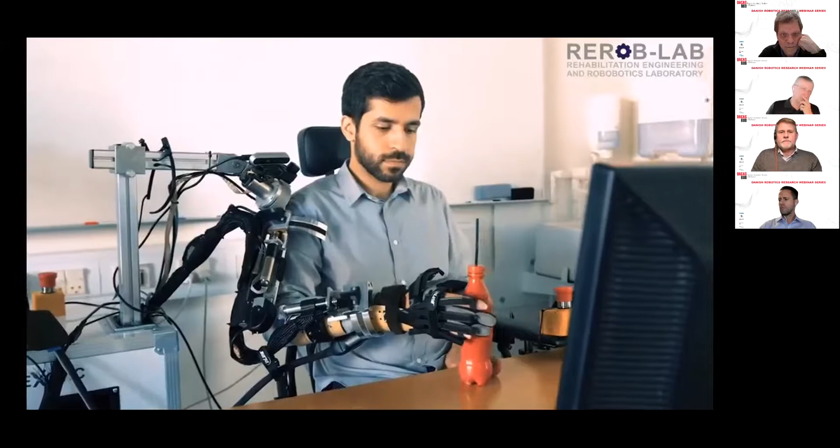Thank you, Thomas. Now we will present the Rehabilitation Engineering and Robotics Lab. My name is Lotte Andreasen Struijk, and I am an associate professor at Aalborg University. Here I am leading the Rehabilitation Engineering and Robotics Laboratory, where we study how robots can help paralyzed individuals. About 5 million people live with paralysis, and this can be caused, for example, by a stroke or a spinal cord injury or a disease like ALS.

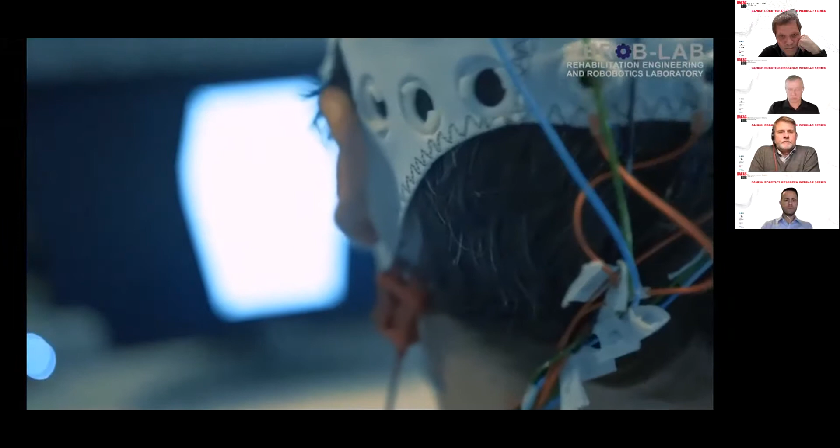Robotics has a great potential to help individuals that are paralyzed, but it's facing a paradox: the higher degree of disability, the higher is the gain, but the harder it is to control the robots. So our aim is to solve this challenge. To do this, we perform research on assistive robotic manipulators, both in nearby and remote settings. We develop new exoskeletons based on size, space, pathology, and user requirements. And we research on different control methods, for example, tongue control, muscle control, brain control, and we combine these control methods into hybrid systems.

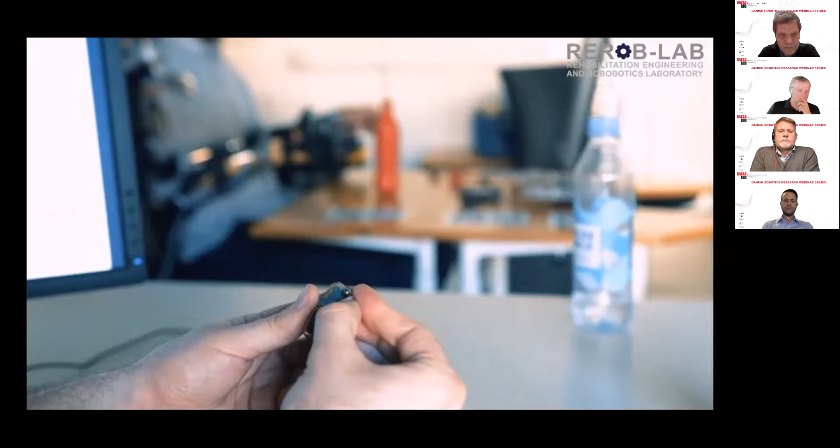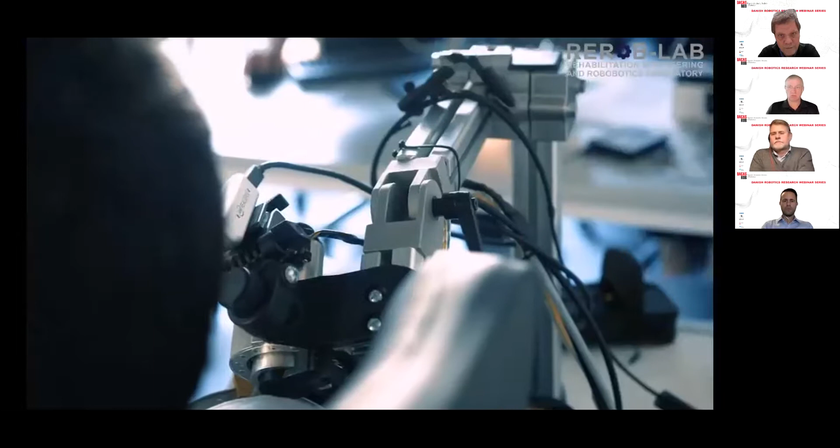We use intelligence and semi-automation with a special focus on shared control, and we test our systems both in able-bodied individuals but also in individuals with paralysis. We collaborate with industry and clinicians and with the users to create useful solutions, and we use the nearby facilities for innovation to transform our research into available products.

In the following, we will present 3 different projects. The first one is the Exotic project, where 4 PhD students and a postdoc collaborate to create an intelligent tongue control exoskeleton. The second project is the Multi-Rob project, supported by the Danish Research Council, where 2 PhD students and a postdoc work together to create brain control, muscle control, and tongue control of an assistive manipulator, and to combine these control systems into hybrid systems. The last project is about brain control of an exoskeleton.

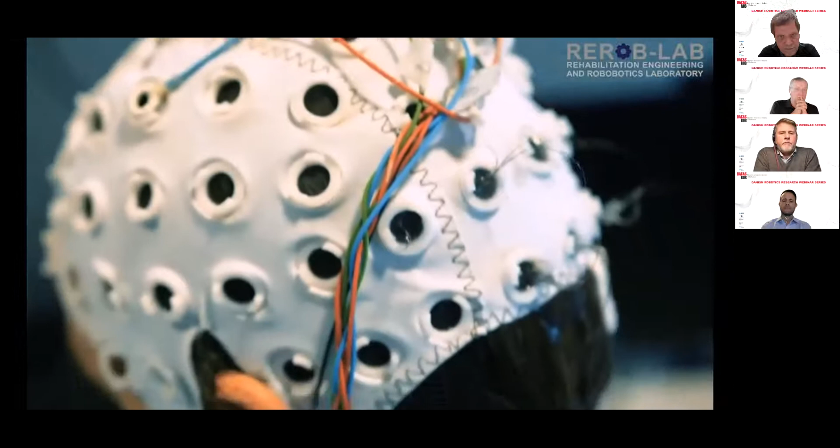So the first project we will introduce is the Exotic project. Here 4 departments work together to create a novel 5-DOF exoskeleton arm, which is semi-automatic and controlled by the tongue using the 9-DOF iTongue control system developed in this lab. The design of the exoskeleton is based on interviews with users paralyzed from the neck and down, and the users prioritized drinking and eating over a longer time, for example snacking, to avoid repeatedly having to ask for help.

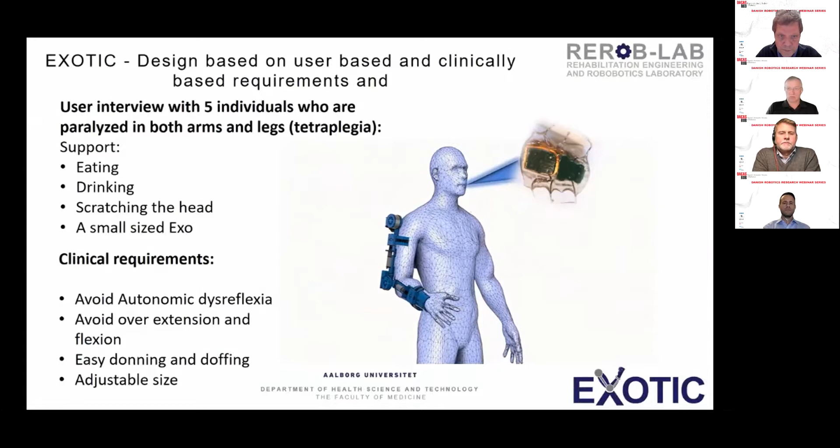In addition, in the design, we included a shoulder DOF reduction due to user requirements related to aesthetics and the limited space while sitting in a powered wheelchair. We used biomechanical modeling to assure that the exoskeleton still had the desired workspace.

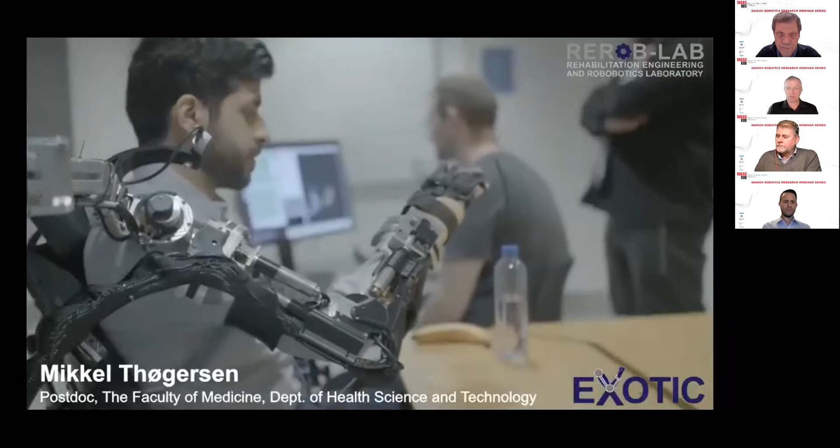The Exotic exoskeleton relies on a rigid structure driven by small motors located along the length of the exoskeleton, together with a soft exoskeleton glove. In total, there are 5 degrees of freedom, including hand opening and closing. The upper arm rotation and wrist joints use a relatively special joint based on a semicircular guide design that twists the arm and allows for a more compact design, as shown in the video.

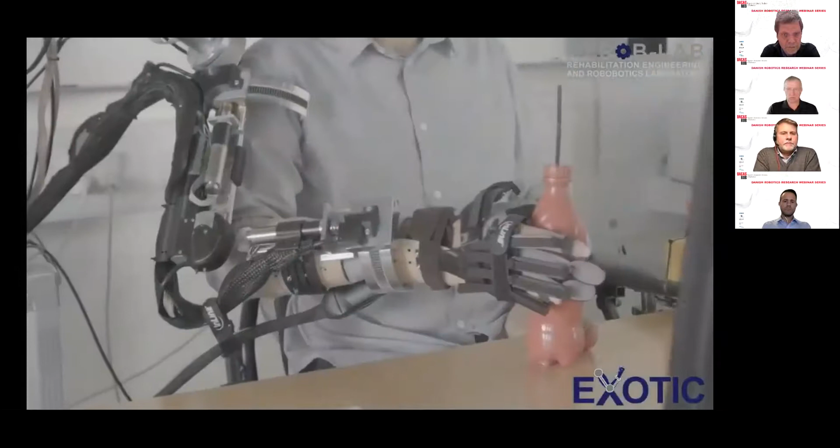For this exoskeleton, ergonomics was an important factor, as individuals with complete paralysis are prone to exhibit an autonomic response to pressure and irritation applied to the skin. Therefore, the exoskeleton has a soft attachment to the arm. As such, the arm is simply carried by 3 ergonomic braces located along the arm.

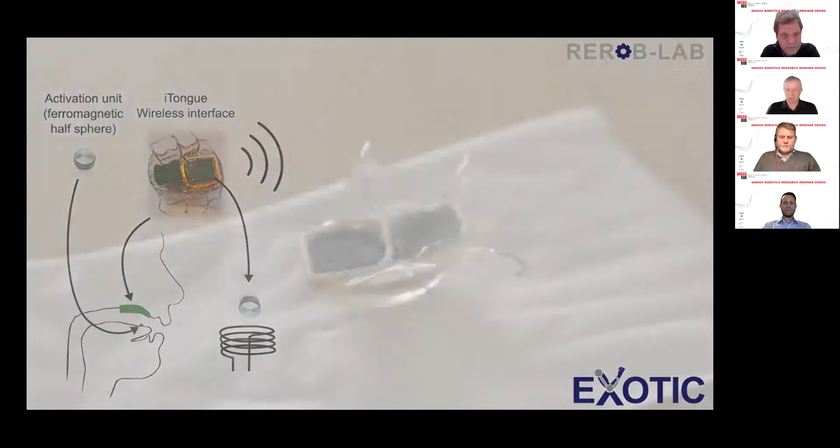The first problem you encounter when developing assistive technology for individuals with complete bodily paralysis is that they cannot use a standard interface technology like a joystick. Therefore, our group developed a wireless tongue control interface some years ago. The interface looks like a palatal brace and is put in the roof of the mouth.

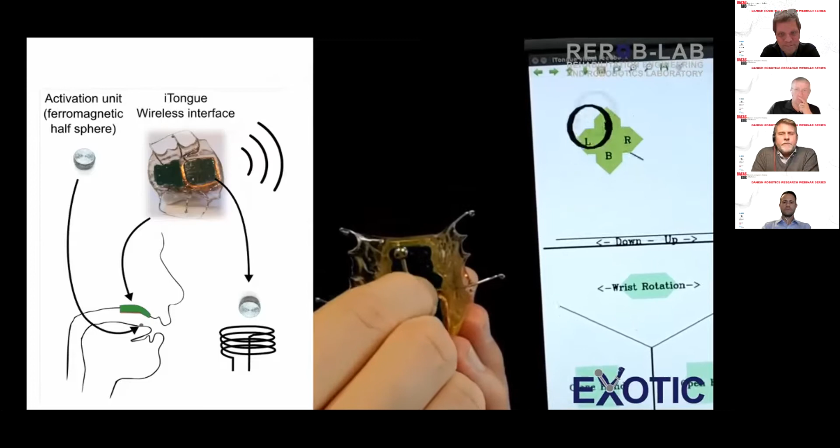The bottom surface of the device can sense the position of ferromagnetic materials, like a tongue piercing, which is exactly how we command this interface. 18 tiny coils are embedded in the brace that detect whether a ferromagnetic material is in the vicinity of the coil. In practice, this enables individuals with complete bodily paralysis to fully control 9 degrees of freedom directly and continuously in an invisible manner.

Using the weighted average of neighboring sensors, we can use this interface to simulate a joystick-like control, as shown in the video. While the tongue interface is already a great and efficient interfacing device, simultaneous control of the 3D position of the end effector is infeasible using a 2D interface.

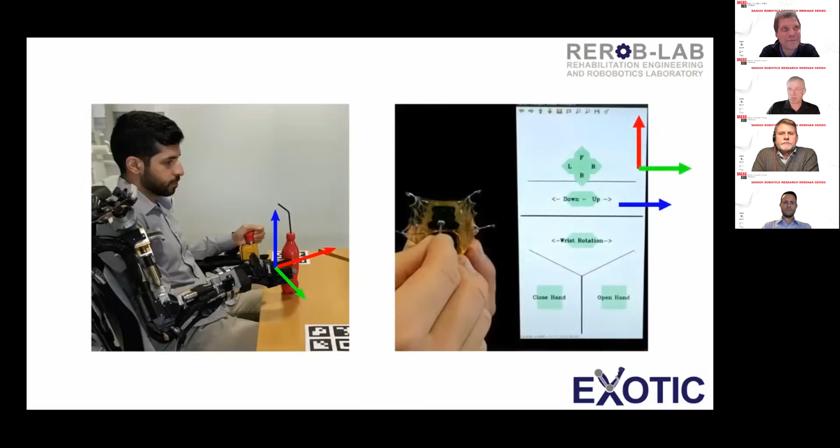To overcome this and make the controls even more efficient, we have added a semi-autonomous control scheme through computer vision algorithms. By detecting the object of interest, we can guide the end effector through a control blending scheme by mixing the user control and predictions of the computer vision algorithm. Through this control scheme, the user is always in control, but the movement is simply aided by the computer vision to generate a smooth trajectory to the object.

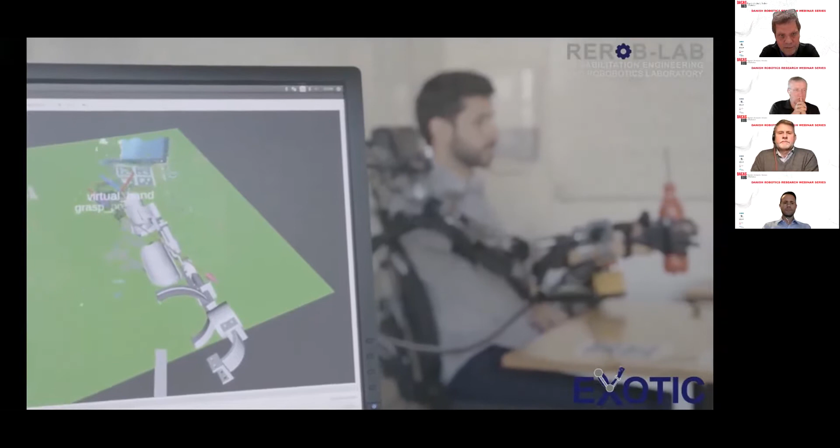Our exoskeleton relies on MoveIt and the ROS backend for our software controls, and motor control is provided by EPOS4 CAN bus-enabled controllers from Maxon Motors.

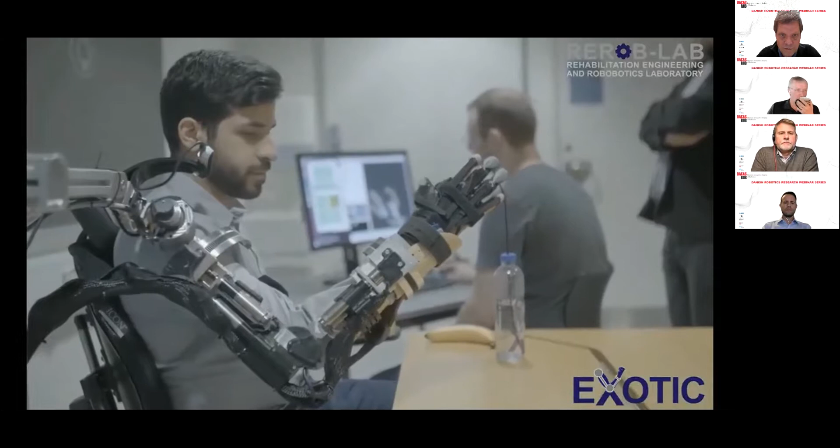This is the first proof of concept tongue-controlled exoskeleton, which has the potential to empower individuals with complete bodily paralysis to become more independent.

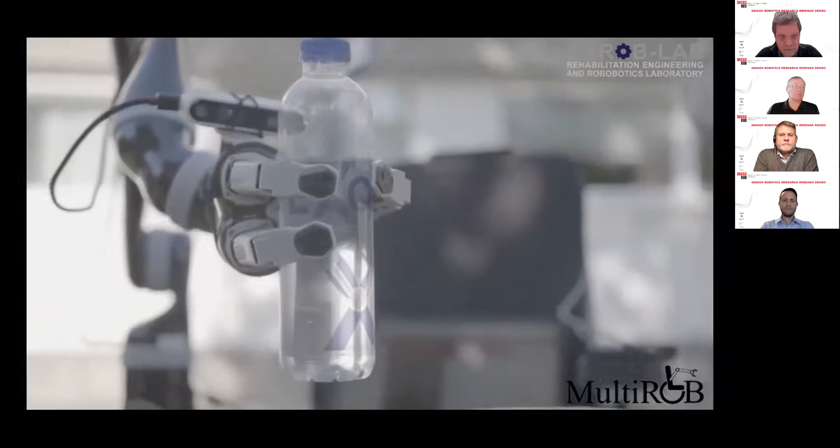Visual feedback from the camera placed on the wheelchair's headrest and on the robot's end effector allows the user to take control from a remote location.

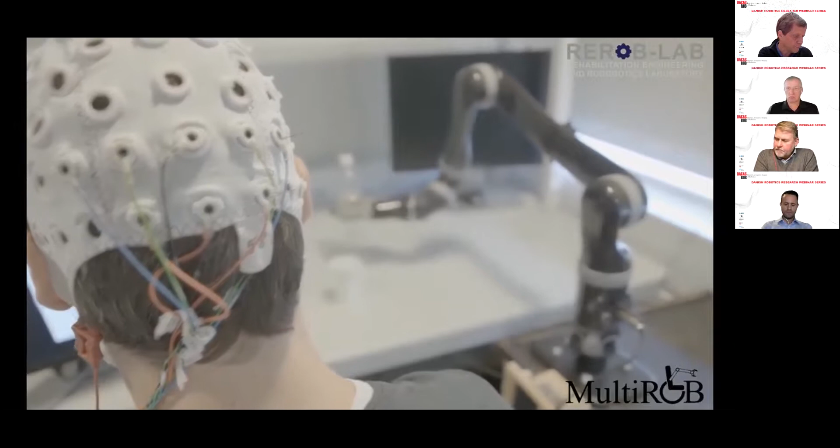In later stages of the disease, ALS also affects the tongue muscles, making the tongue functionality inadequate to fully utilize the tongue control. We are therefore designing a brain-computer interface that allows manual control of the robotic arm. Each control command is presented to the user as frequency-specific blinking areas on a computer monitor. When the user then focuses their gaze on a blinking area, their brain signals will induce steady-state, visually evoked potentials that can be measured and classified to determine which blinking frequency and thus control command they focused on.

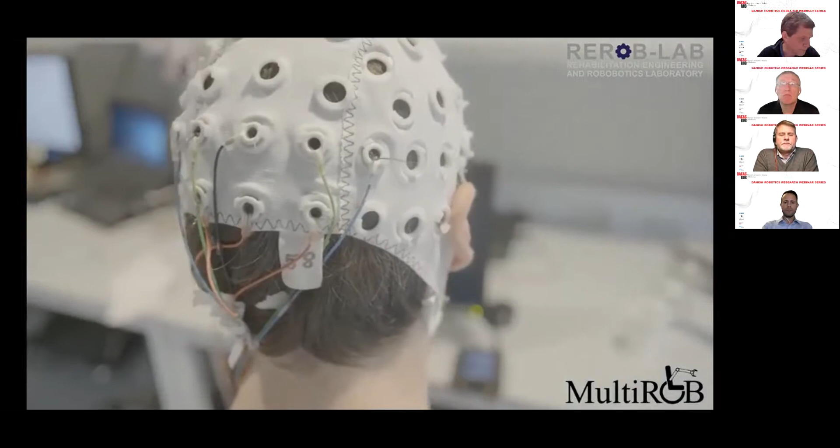Still, a brain-computer interface will perform much worse compared to the tongue control. We are therefore also designing a hybrid tongue-brain control interface that combines remaining tongue functionalities with brain signals. This will prolong the use of the reliable and fast tongue control while preparing the user for the eventual necessary full brain-computer interface.

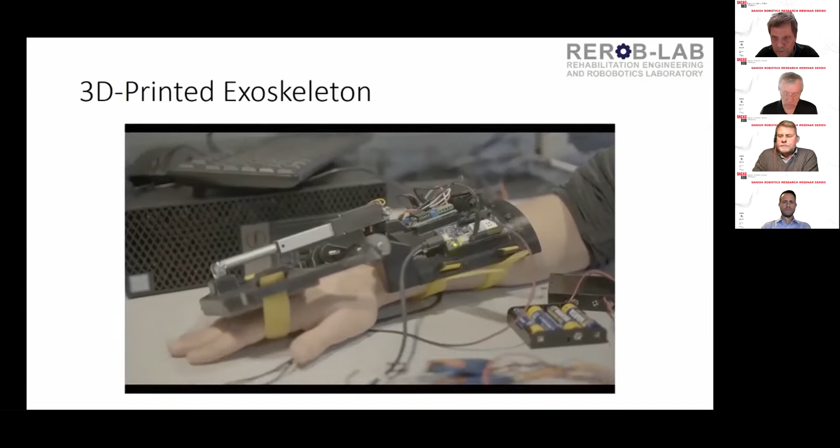In our lab, we have worked with this approach for several years, and we are currently looking into developing cost-effective approaches that can be used in rehabilitation clinics and in home settings. This exoskeleton is 3D printed with a linear actuator, which performs extension of the wrist, and is controlled using imagined movements, which are picked up by the BCI through an Arduino. Thank you very much for listening.

Okay, thank you very much to the rehabilitation team. If any of you listening have a question, please put it in the chat function. I do have a question myself, so I'll post that to the team. Could you give us an idea of the main scientific challenges you are currently working on in order to bring these exos out into use?

Thank you, Thomas. The main challenges when we combine exos with health has to do with, for example, aesthetics, that the users feel the exo has a nice design. It's also the size of the exo, that they feel they can use it at home, bring it home. And in that relation, also the powering is important. So these are the things, and then there is the challenge in controlling it. In future, I think we will be using much more intelligence to improve these issues.

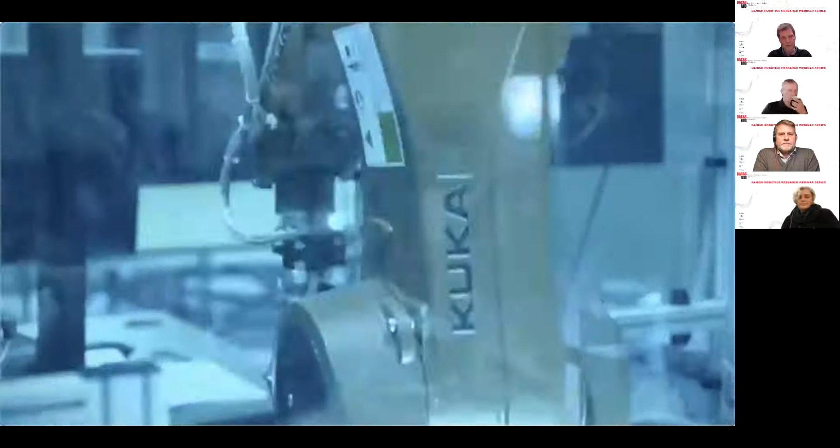My name is Ole Madsen. I'm a professor here at Aalborg University. I work here at the AAU Smart Lab, where I do research in robotics and in how robots are going to be used in the factories of the future.

The lab is a lab where we investigate robots. It's a multidisciplinary lab where we are focused on advanced robotics, with a special emphasis on manufacturing robots.

We created the lab because we saw there was a big need for robots in industry. The industry is challenged by small batch sizes, by constantly introducing new products and so on. So there was a need for new robotic systems for manufacturing.

We also saw a need for multidisciplinary research, and we found that having a physical lab, a place where researchers from various departments could meet and do research, was very useful for the research that we were doing. We have 4 focus areas.

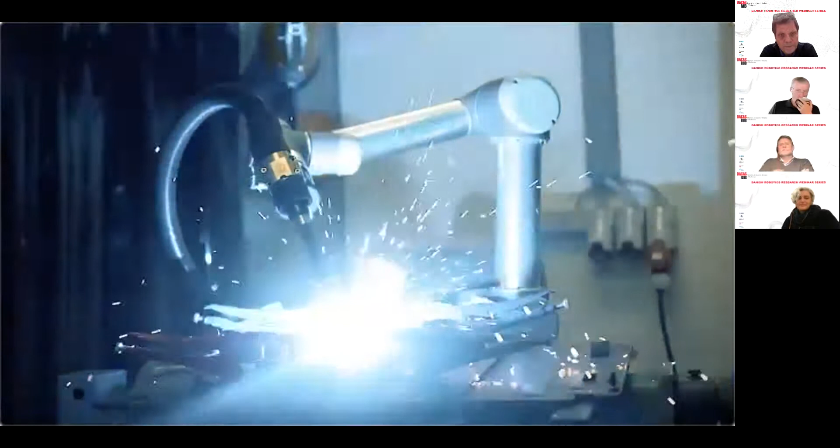Secondly, we are working with exoskeletons, or doing research on exoskeletons. The research here is aimed at giving people with limited mobility the option to walk or use the upper body

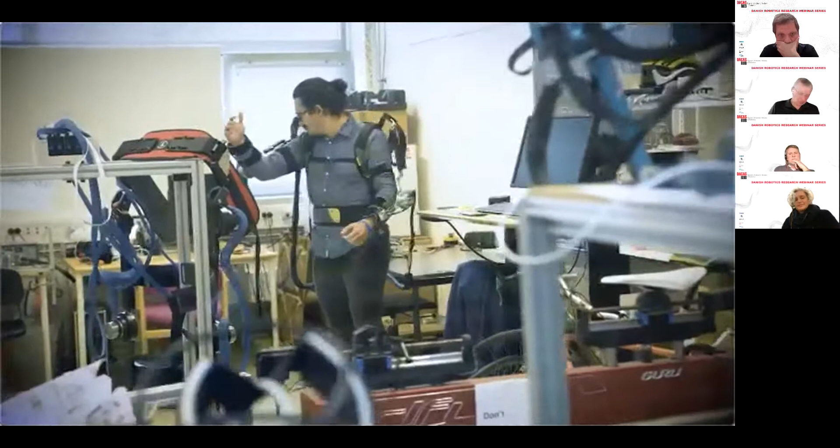for various tasks. Then we do research on AI, on self-learning and self-adaptive systems - a growing area where a lot of new technologies are coming out that we really can benefit from in the robotic world. One of the projects we have there is the Little Helper project, which is a project on a mobile robot which can help you doing a simple task in your manufacturing environment.

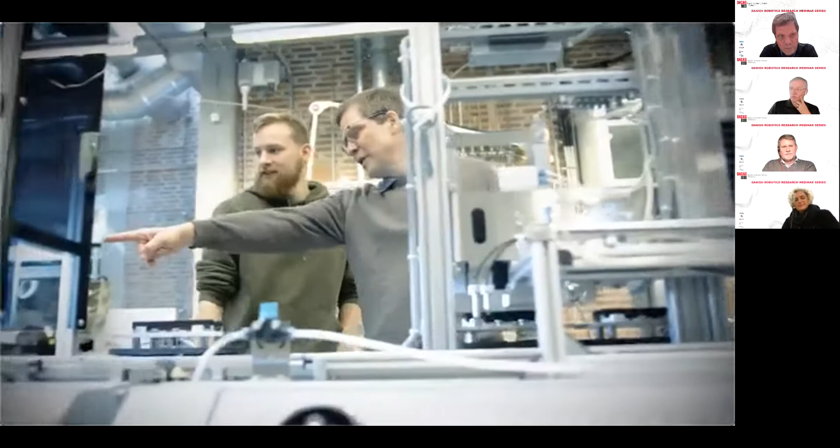And finally, we do research on robots in larger production systems. Here we have a special focus on the role that robots will play in Industry 4.0, that is the future of manufacturing. Most of the research we're doing here is done in collaboration with companies.

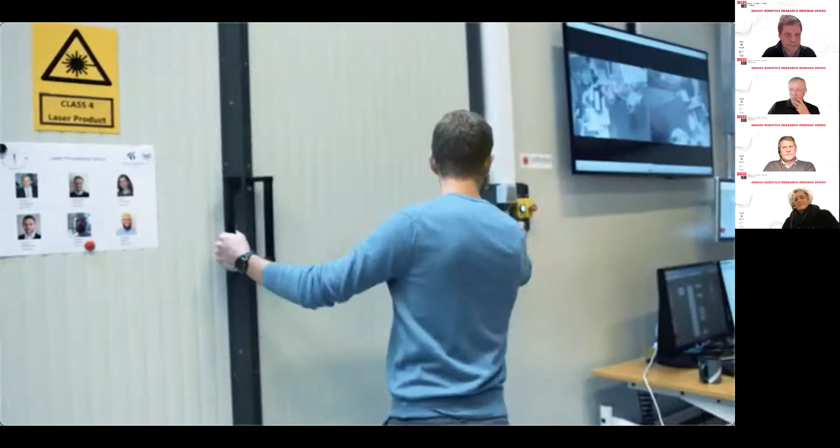They come with applications and we use them as specification for our research. We also have partners who are system integrators and who are building technology, so people who are building robots. And finally, we have a number of universities around the world where we collaborate.

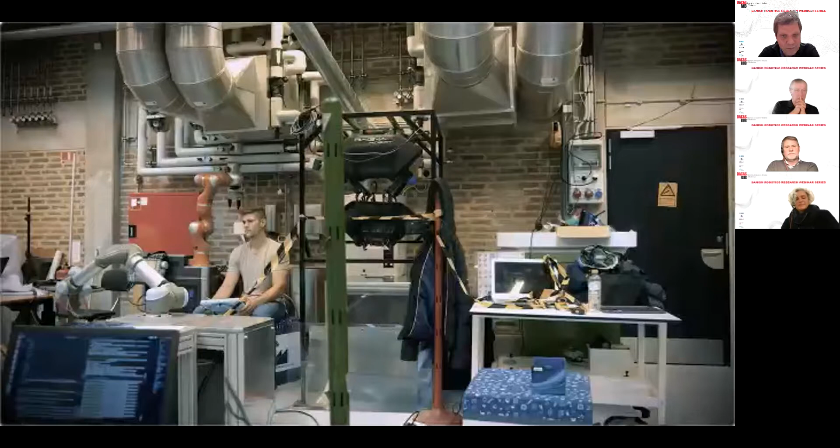In the next couple of years, we want to investigate the possibility to build a swarm factory. That is a factory where the manufacturing equipment, including robots, are very, very simple, small machines that individually can do very simple tasks. But when we combine them, then intelligence will emerge, and we expect that we can design much more advanced and flexible systems than we have today.

Hello everyone, I'm Dimitris Chrysostomou, and in this segment I'm going to tell you more about our research in autonomous industrial mobile manipulators. As you may know, most industrial robots are fast, reliable and safe to use when they are behind protective fences. However, their mobility and flexibility is limited, as they have to be stationary, bolted to the ground and programmed for one task at a time.

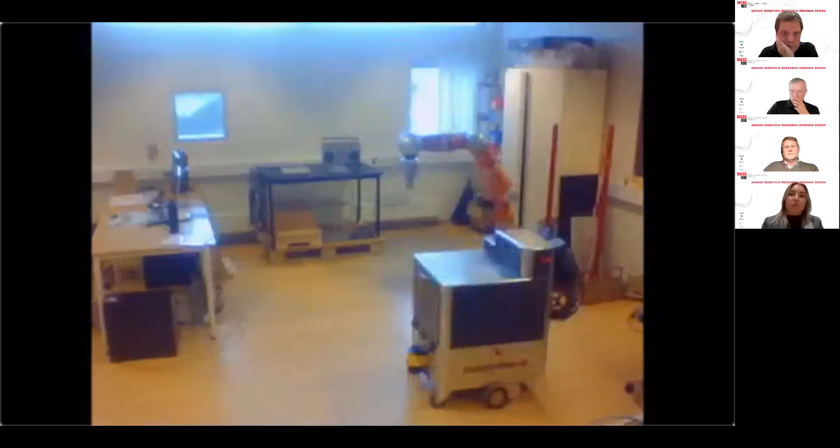Almost a decade ago, here in the Robotics and Automation group of AAU, we developed a robot assistant which can coexist with users for safe and easy interaction. We call it Little Helper, our flagship research platform which we use to bring flexible solutions, easy to program and integrate into a variety of industrial tasks and scenarios.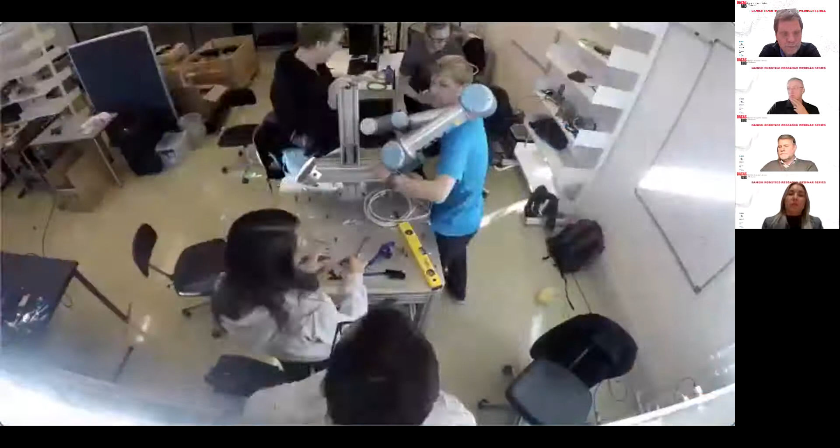In collaboration with many industrial partners, we have developed different versions of our Little Helper research platform. It is a modular platform that consists of mobile or movable bases, while it can support 1 or 2 robotic manipulators. It adapts accordingly depending on the level of interaction we want to accomplish with our users.

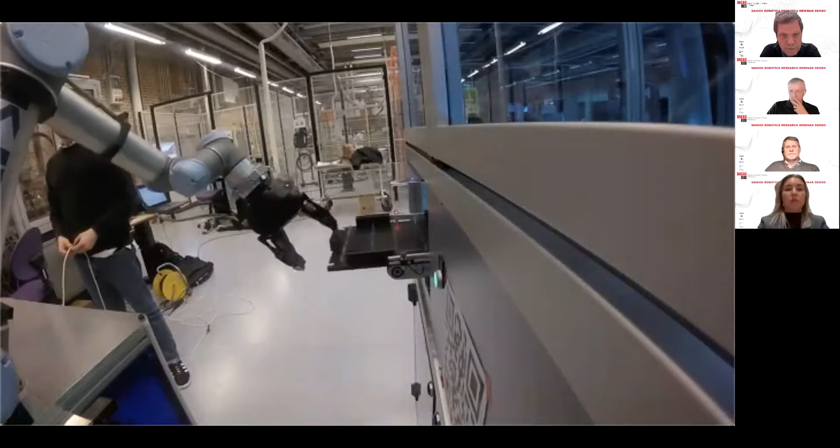Sometimes we have to tackle tasks where we need to work away from users, executing everyday procedures such as delivery scenarios inside our smart production facility, where mobility, precise calibration, localization and mapping are very important.

We also want to facilitate users who work in sensitive environments, where human presence should be limited. In these cases, we employ virtual reality and augmented reality techniques, which can provide a unique perspective of the working environment to the users, while they operate Little Helper from another room.

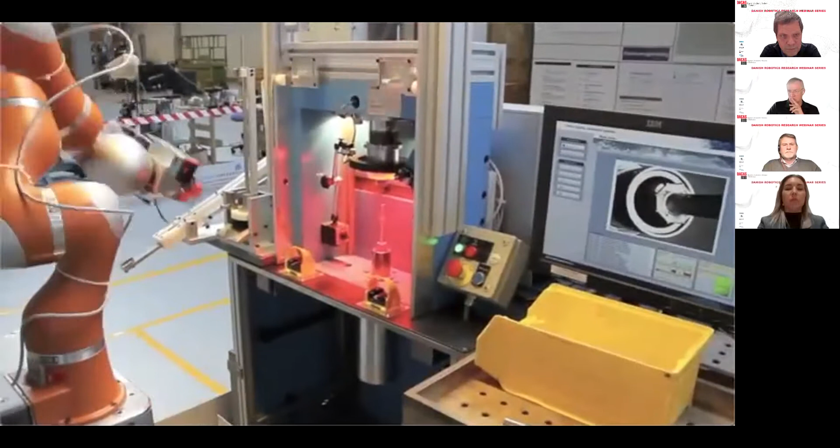Assembly of industrial parts is another area where we use Little Helper extensively. It is a very demanding task where advanced robot functionalities such as force feedback and station calibration are critical. In these cases, accurate object detection, recognition and grasping are very important as well.

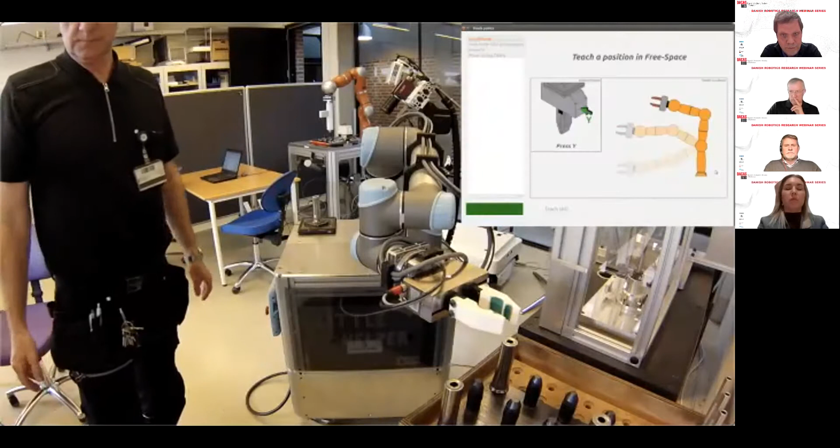On top of everything, Little Helper is developed to enable non-expert users to use a robot in everyday industrial tasks. For that reason, it runs a skill-based programming interface in the background, which has been designed to facilitate easy and fast instruction of collaborative robots by inexperienced users, while it supports quick integration of existing off-the-shelf components in terms of hardware and software packages.

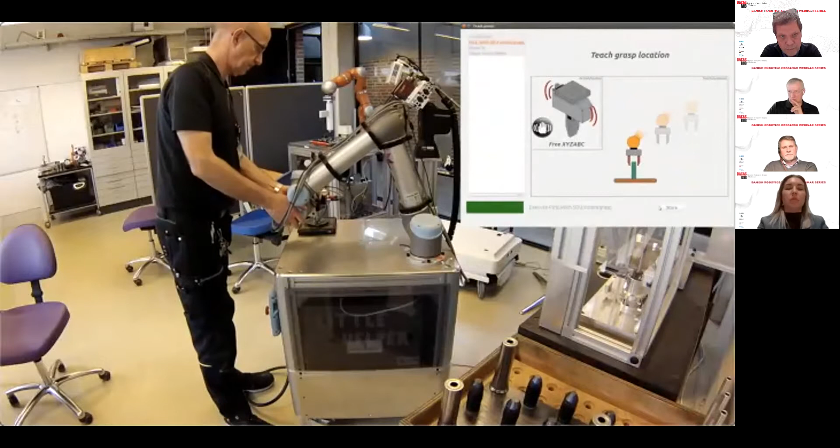Naturally, when we collaborate in close space with users, safety is a top priority in our research. Therefore, we have equipped Little Helper with user detection methods based on image processing and artificial laser walls. There, Little Helper can detect the user and adapt the speed of the robot arm, and it can communicate its current operating status with color-coded visual feedback.

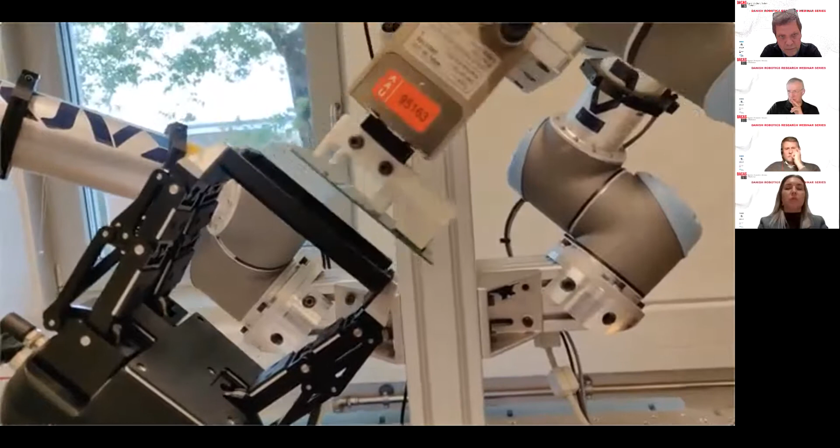Finally, Little Helper is also the platform we use as a basis for our future robotics research. Towards our vision for a more sustainable society, many of our current projects focus on assistive human-robot collaboration tasks for automated disassembly processes of electronics and industrial components. This way, we promote circular economy initiatives and reduce the environmental footprint of manufacturing industry.

Stay with us, as Casper now will present our future research direction on swarm production, and later Simon will dive into our AI research in industrial robotics and manufacturing.

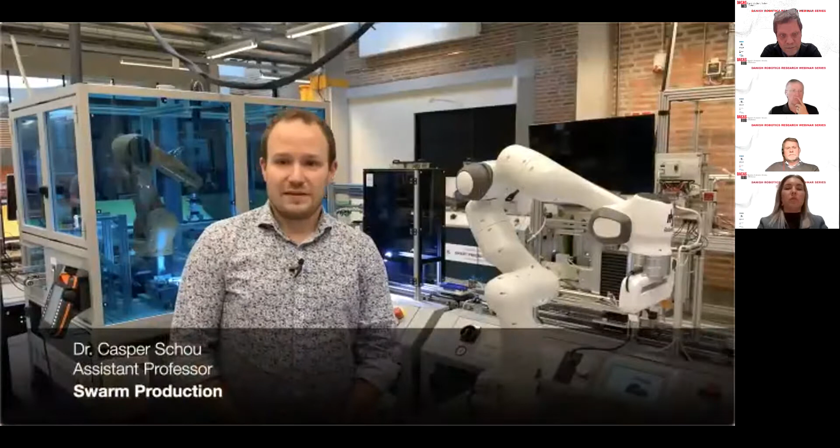Thank you. I'm Casper Schou, and my primary research is within solutions for smart factories. Let me present to you our research on swarm production, which is a new upcoming research area where we combine the domain of swarm robotics with industrial manufacturing to achieve high flexibility on the shop floor.

Here in our AAU 5G Smart Lab, we have established a smart factory environment, including a Festo CP factory production line, our mobile robots and Little Helpers, operator assistance tools, and a suite of digital solutions interconnecting these assets. In terms of flexibility, even this Industry 4.0 production is inherently constrained by the use of conveyors as they route products along fixed paths, limiting us to a sequential flow.

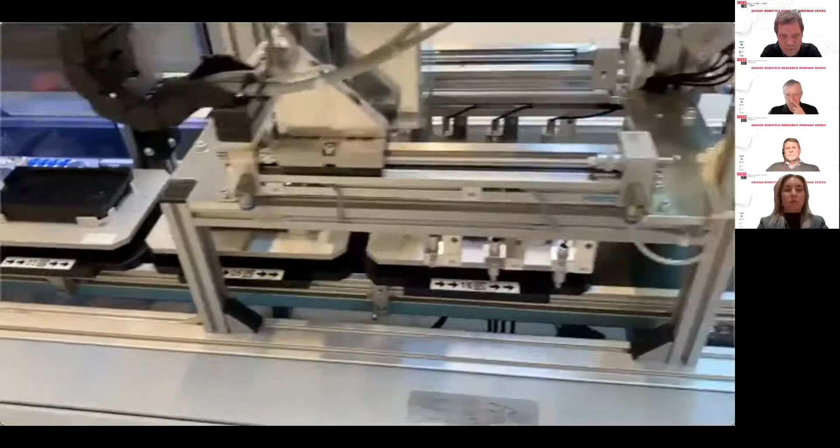With offset in this constraint, we are motivated by the vision of having products transported using cheap, small, mobile robots to create the production paradigm we call swarm production. Using mobile robots not only gives us large routing flexibility, but also makes the system more robust against failures, allows easy scaling of capacity, introduction of new processes without system downtime, and allows individual order flows and priorities.

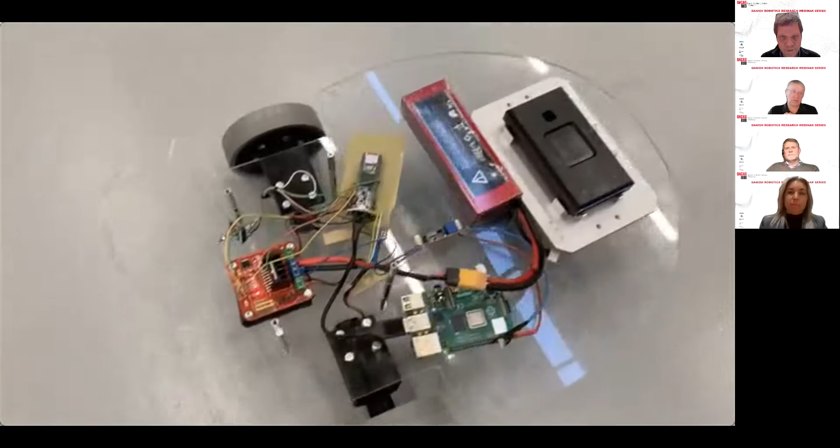We imagine the swarm will be composed of a variety of different robots with different capabilities, ranging from small part-carrying robots to Little Helper-sized processing robots. Currently, we are carrying out early design sprints, experimenting with the layout and composition of both part-carrying robots and processing robots. To decrease the cost of the mobile robots, our architecture centralizes the navigation and online route planning of each robot on a central edge cloud.

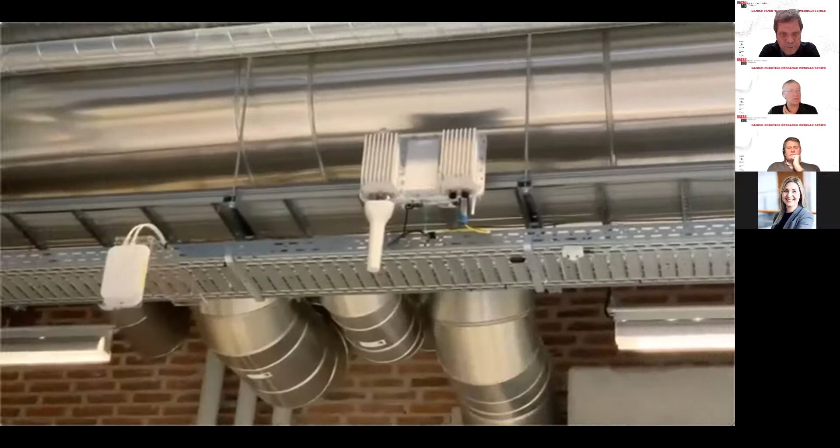Thus, fast, low latency and robust wireless communication is required between the robots and this edge cloud. For this, we have built up an infrastructure with both private and public 5G networks, Wi-Fi 6, and both an ultra-wideband and an ultrasonic positioning system - an infrastructure that allows reliable and low latency communication, even when using a swarm of devices.

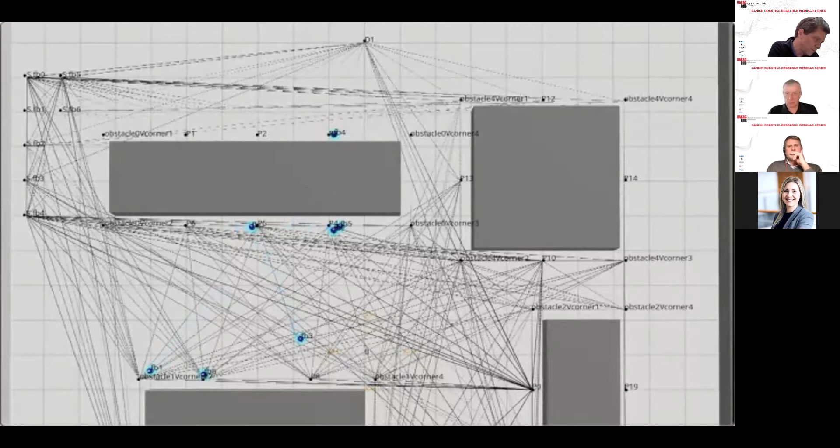Finally, retaining production efficiency while exploiting this flexibility offered by swarm robotics calls for very frequent task plan updates. Together with our colleagues from computer science, we are working on distributed, near-optimal task planning and scheduling strategies using the AI technique called Q-learning. Some of these strategies we are currently testing out in large simulation environments, including hundreds of robots and a highly dynamic order flow.

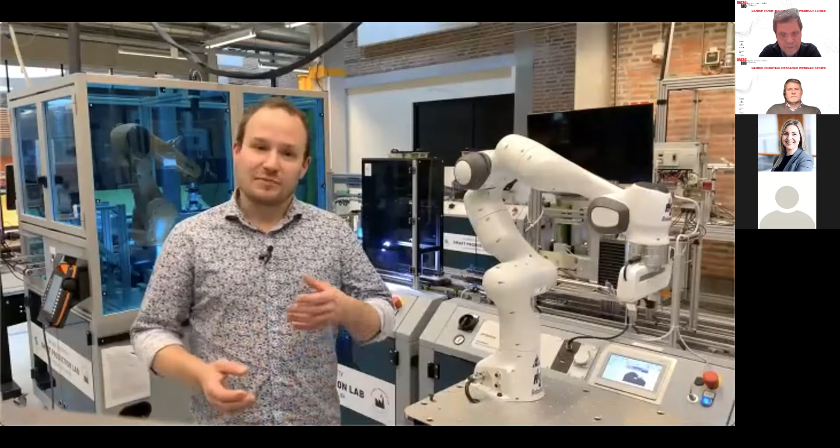And now over to my colleague Simon, who's going to present much more in depth about our AI research.

Hi, my name is Simon Bøgh. In our next part of research, AI for industrial robotics and manufacturing, we are tackling the AI gap between research and industry, where we focus on adaptive and self-learning robots and automation systems.

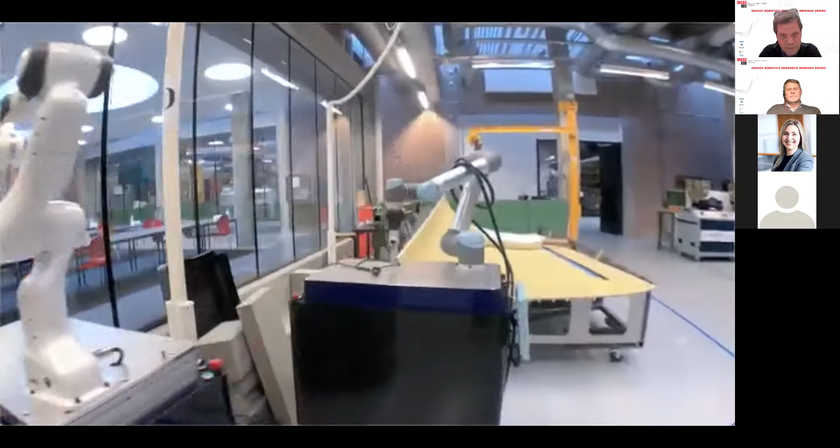AI is redefining the landscape of intelligent robotics and automation in manufacturing industries. We help manufacturing companies navigate and demystify the hype around AI and put it into practice. We do this through student projects, research projects, and strategic collaborations with companies. Let's have a look at some of our projects.

Deep reinforcement learning is one of the pinnacles of AI today. In one of our projects, we work with robot grasping. How can we enable a robot to, on its own, learn how to grasp objects without knowing anything beforehand? The robot acts as an autonomous agent where it learns how to act optimally and carry out the task without any supervision from a human. Through the interaction with the object and the environment, it receives rewards, and over time it learns how to act in an optimal way. We also use this technique for mobile robot behavior and navigation.

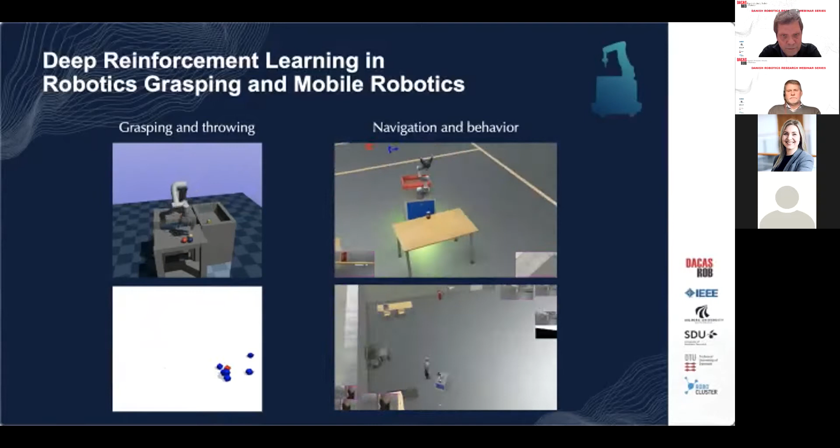So how can mobile robots learn how to navigate a human environment in an optimal and safe way? Human-robot interaction is always critical in many robot applications. The natural interaction between the human and the robot we enable through natural language processing and acoustic analysis. We design and develop voice assistants so the human worker can naturally interact and talk to the robot. Through various commands, the robot learns how to carry out tasks that are given by the human worker. Acoustic analysis can also be used for other industrial processes, for instance robot welding.

By recording the acoustic signals and time series data from the welding process, we can analyze and assess the quality. We also rely on computer vision in many of our robot applications, since a robot system or industrial task without eyes makes it very difficult to solve.

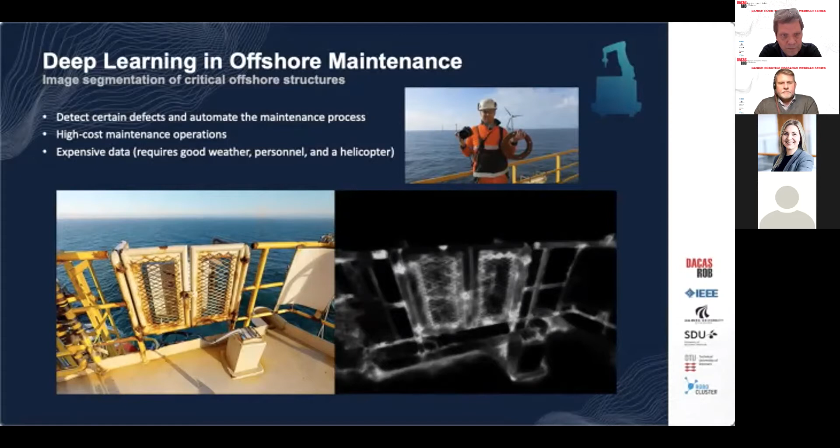In one of our projects, we detect defects on offshore platforms. This is usually a very tedious and dangerous task which requires a lot of manpower, and in the end it becomes very costly because we have to send humans to the offshore platforms. By designing an automated system, we can detect certain defects and automate the maintenance process needed for these kinds of industries.

Finally, we want to enable artificial intelligence for small and medium-sized enterprises. These days, we see that AI is primarily for universities and larger companies who have the budgets and skills to actually carry out a deep learning project.

Through one of our projects, we investigate how we can enable advanced technologies for smaller companies so they can also harvest the benefits of artificial intelligence. In this case, we need to wrap the methodologies and models in an easy and intuitive platform which can enable the shop floor worker to actually train the network without knowing anything about deep learning.

In this case, we want to be able to feed many different kinds of data inputs, which can be time series data, acoustic data, images, videos, and so on. So AI is a natural enabler for improving the manufacturing industry of the future. Our vision is to continue close collaboration with industry and enable these technologies, making them accessible for both big and small companies.

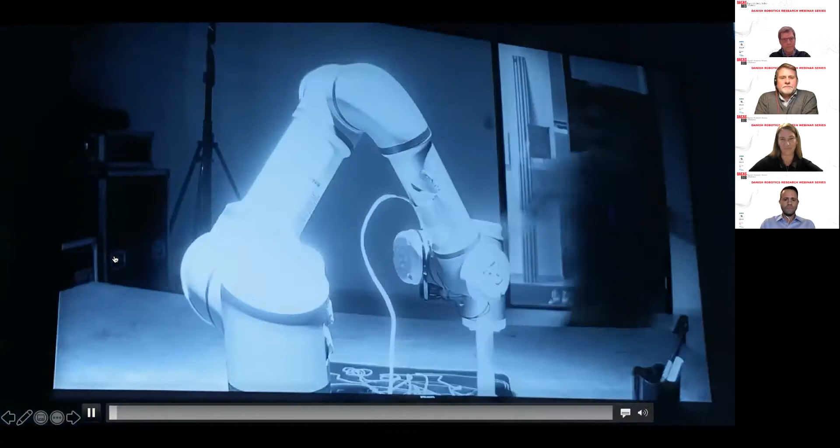My name is Elizabeth Jochum, and I lead the Relate Research Laboratory for Art and Technology, housed here in the Faculty of Humanities. We're an interdisciplinary research group, with members from the technical faculty of IT and design, and we also collaborate with the engineering faculty in order to build bridges across our fields. In our lab, we research the connection between the visual and performing arts and existing and emerging technologies.

We research how to best integrate these new tools and practices into art making. Artists always use tools, whether it's a paintbrush, a musical instrument, or a computer, and in our lab we think of robots as tools for art making. We want to see how robots can maybe contribute to generating new art forms. But we're also really interested in understanding how the arts can open up new perspectives and maybe even generate new solutions for robotics.

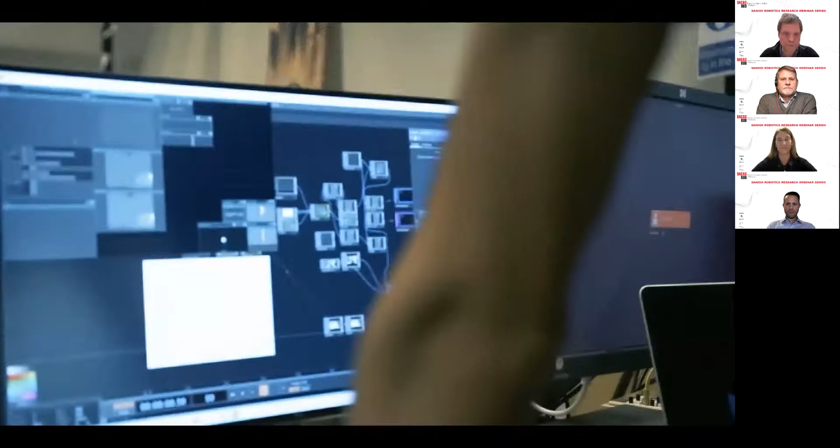All of the research we do is grounded in a concrete problem from the real world, and we use artistic research and artistic methods to investigate that problem and come up with possible solutions. For example, the drawing robot: we're working with an industrial robotic arm, and we've programmed it to engage in a collaborative drawing task. Now, there's nothing really new or novel about programming a robot to draw, but instead we're looking at something a little bit different.

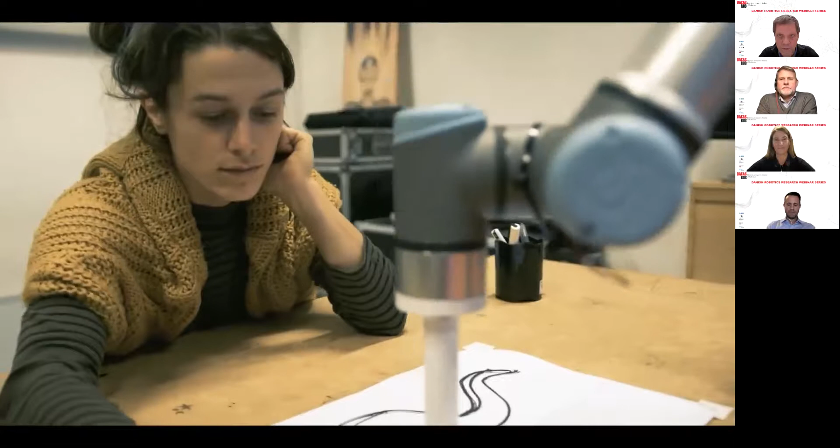Instead of thinking about a robot that only produces drawings, we're thinking about drawing as an activity that models a bunch of different behaviors and things we're interested in when designing human-robot collaboration. In human-robot teams and collaboration, you have to have a really strong understanding of nonverbal communication, turn-taking, intentionality, shared workspace, and shared goals. The drawing activity becomes something that the human artist and the robot can do together, and we use drawing as a model for getting a better understanding of what's involved in human-robot collaboration.

It might seem strange at a moment in history when the world is facing serious problems globally to be focused on using new and advanced technologies to make art. But I'm convinced that the most pressing problems the world faces today are not going to be solved through monodisciplines. All the latest discoveries and most important innovations have come from cross-disciplinarity, from people working across fields. And that's exactly what we're trying to facilitate in the Relate Lab.

As I mentioned in the video, the Relate Lab is an interdisciplinary group of international researchers from several departments: art, architecture, computer science, human-computer interaction, sound studies, dance, and media art. So we are truly multidisciplinary. We all work with technology, and we're united in our belief that collaboration is integral to innovation. In particular, we think about robots as catalysts for innovation in art and design, and vice versa.

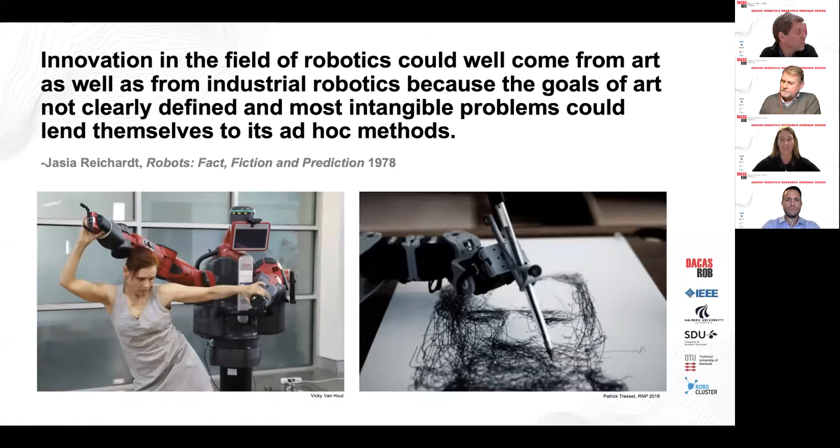One of the things we look at in our lab is robots and dance. We know that if robots are going to be able to move in human environments, they're going to have to be able to move spontaneously and considerately around people. This means being able to judge where people are going and what they want based on observations of how people move. So we invited professional dancers into our lab in order to study how they approach movement.

Instead of thinking about designing motion trajectories and path planning as an engineering problem, we think more about it like a dancer might, as a choreography problem between people and robots. So here's a short clip from an improvised performance that we did at a theater festival in Aalborg.

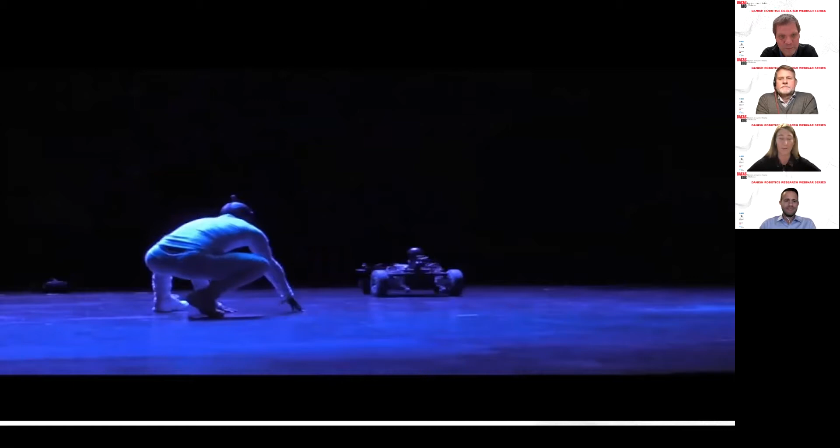So all of this was improvised. None of this was pre-scripted, and the dancer had only met the robot maybe 2 or 3 times before this and had never performed according to this kind of choreography.

But the goal here is not to teach robots how to dance, and it's not about replicating specific dance styles. Instead, we're using dance improvisation as a bottom-up approach for thinking about embodied interaction, about what it means for robots and people to move spontaneously together. We're trying to get closer to that question of the swarm lab, I think, that Ole mentioned earlier.

Another area we work on is dance and exoskeletons. We've got a collaboration with the international artists Louis-Philippe Demers and Bill Vorn from QUT in Brisbane and Concordia in Montreal. Their artwork Inferno is an interactive performance where audiences dance in exoskeletons during a 50-minute long performance. During the performance, the exoskeletons are controlling the movement of the participants' upper limbs, but they are able to move around and dance together.

And if this sounds strange, I've got a short video of what the performance actually looks like.

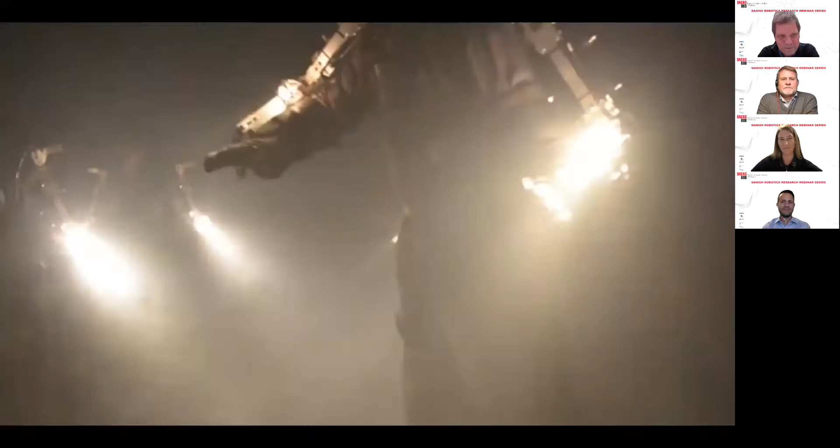One of the things we learned from talking to our colleagues who work with exoskeletons for rehabilitation was how difficult it can be to design comfortable exoskeletons and motivate people on how to use them. We already heard from Lotte earlier about some of those human factors, those real challenges to exoskeleton adoption. But this artwork has audiences all over the world literally paying to have this experience for an hour where they're wearing a 12-kilo exoskeleton. So I thought, okay, there's something here, right? We can explore this connection.

We're working together with the artists in order to develop new methods that combine dance and movement therapy with exoskeleton training and rehabilitation. And what we're finding is this approach has the added benefit that because it's a social activity, it also improves motivation and well-being, as well as the benefits of physical rehabilitation.

Now, the last project I'm going to talk about is Heart. You saw some clips from the collaborative drawing robot in the video. Last May, we received a grant from the Health Foundation to develop workshops for mental health patients in collaboration with the local government's Arts and Health Culture on Prescription program. The goal here is not to make a robot draw, but rather to use drawing as an activity for studying human-robot interaction. We want to use these drawing and painting workshops with mental health patients, both in the artist studio and in the lab, to identify which factors are most important for people when working alongside robots. We hope to expand this work in other hospital settings with other populations in the context of other arts and health initiatives.

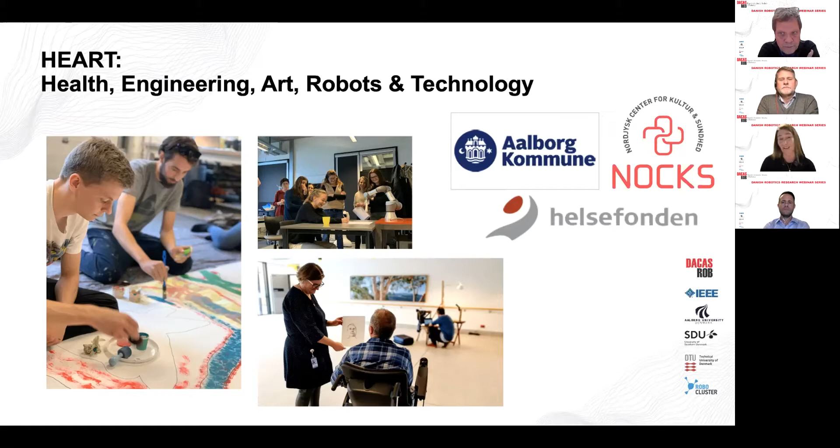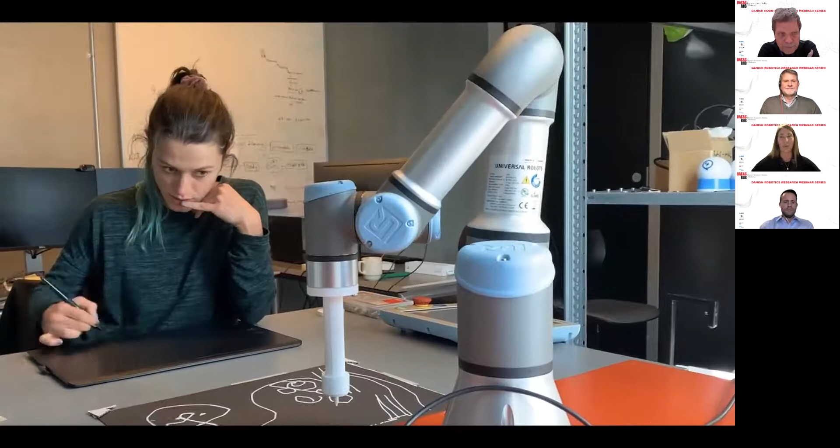We're also exploring the connection between dance, drawing, and human-robot interaction and embodied activities in general that rely on technological interfaces. Here you see Valeria, our artist in residence, using a stylus to teleoperate the robot, producing a drawing. Using the same technology, she starts to use her body as a tool for controlling the robot's motions. Then using computer vision, we track her movements and generate new drawings, which are projected on the floor. So essentially, she can start performing.

We performed this at the National Museum of Science and Technology here in Denmark, which was the short clip you saw. We're looking at dance as a form of both science communication to show how robots work, but also as a way to study the relationships between human environments, human bodies, visual tracking systems, and robots.

Another aspect of our research in the lab is the critical and ethical study of new and emerging technologies. My colleague Morten Søndergaard co-founded an international conference series titled Politics of the Machine, which critically examines how machines and other technologies are impacting culture and perception. This is great because it's an example of an interdisciplinary conference that bridges humanities and STS discourses with applied robotics research.

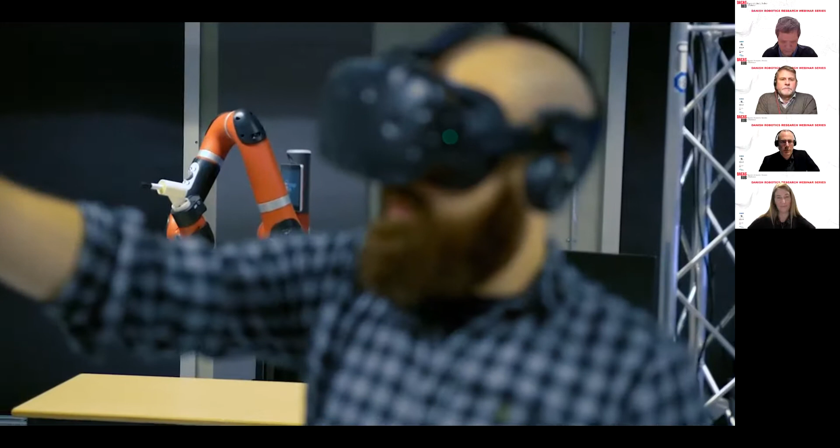We focus on human factors in human-robot interaction, and that means we have quite different approaches and methods we look at. We run traditional experimental setups where we investigate specific interaction behavior, but we also started to look at the bigger picture, so what is it that a user wants from a robotic system. There we work a lot with healthcare institutions where we go in, talk with the staff, talk with, for instance, the residents in an elder care center, to find out which kind of robotic technology makes sense in their daily life or work life, and then start developing the systems with them.

Currently, we're in the lucky position that our research seems to be very interesting also for others. For instance, we are currently starting up a new EU project where we will be leading the HRI research, which brings together different industries across Europe. So that's a very nice setup for us.

I think the work that we're doing is extremely relevant and important currently, because we see that robots move out of their restricted environments, for instance on the factory floor, and come into more dynamic, more social environments. That happens in industry, where we have collaborative robots coming up now, but it also happens in more social settings, in healthcare, in rehabilitation and so on. And if we want to make this work with people, then we need to look at these human factors that we are focusing on.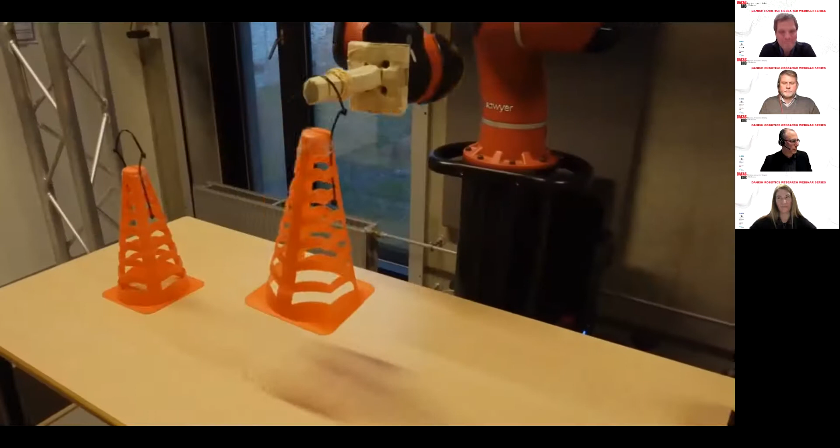Trust in human-robot interaction is becoming more and more relevant with robots moving into dynamic and social environments. We can see that, for example, with collaborative robots in industrial settings or with social robots in care or educational contexts like museums. Trust becomes important because it determines the success of the deployment of the robotic system.

It has been clearly shown that trusting a system not enough leads to suboptimal use of the system. Trusting the system too much, on the other hand, can have hazardous consequences both for material or even human lives, for example, when the system is not monitored appropriately. Thus, ensuring that the user or operator has an appropriate level of trust is key for the utilization of a robot. The challenges are now twofold.

We do not know how to measure trust in the interaction, for example, by observing the user. And we do not know how we can manipulate trust in the interaction. In the following, we are going to present two studies that look into these two aspects.

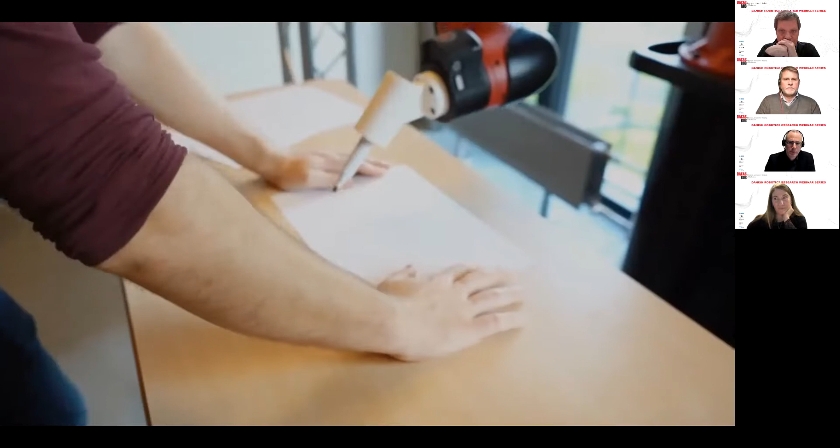Trust is a multidimensional concept based on characteristics of the task, the environment, the human operator, and the robot. Current trust measures are, though, mostly post-hoc questionnaires that measure the subjective impression of the user's trust towards the robot. While this can serve as a kind of ground truth, it does not help us to regulate trust in an ongoing interaction.

Instead, we need to be able to correlate observable interaction behavior to the user's trust level in order to prevent over or under trust in the system. Potential trust indicators are, for example, body postures and movements or physiological measures like GSR or heart rate variability.

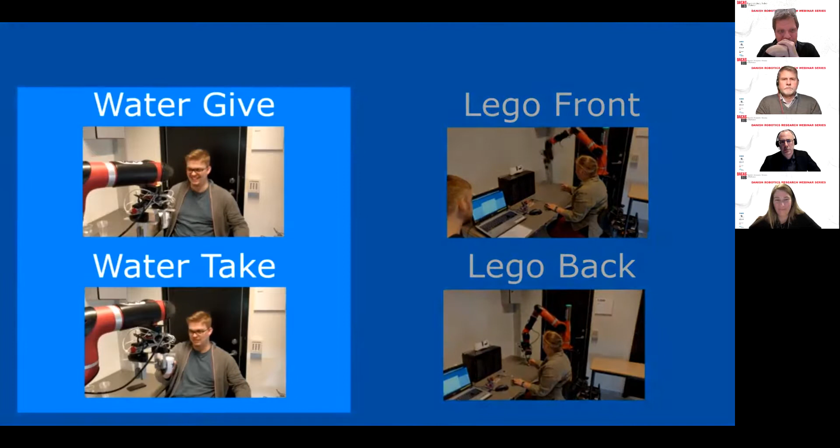In our experiments on close proximity collaboration, we are controlling most of the above-mentioned characteristics to be able to relate trust measurements and observable behavior. We can see how the changes in the robot's operating speed, for example, but also in the robot's placement or the task itself influence behavior and trust measurements.

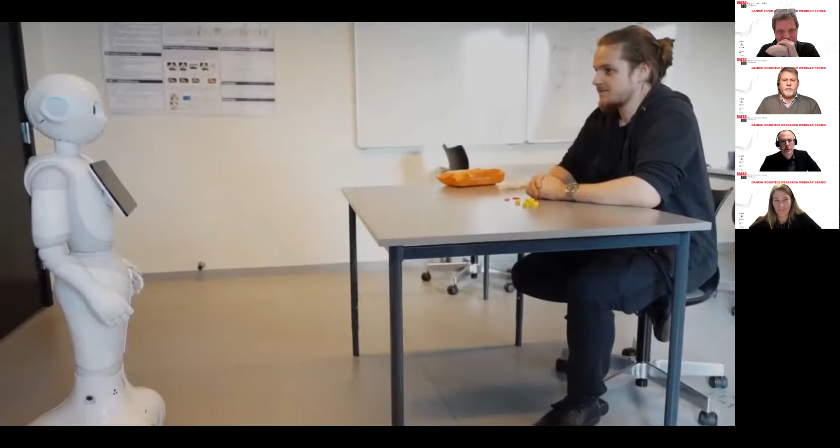One additional challenge is that we do not know yet which behavior of the robot or which type of error breaks trust. So in another series of experiments, we started to look into the elicitation of specific levels of trust. In this study, Pepper serves as an instructor in a building task.

We looked at two variables: a robot that recognizes the user's task behavior correctly versus one that has recognition errors. The second variable was a robot that gave correct instructions versus one that gave incorrect instructions. Results show that we are able to control the user's level of trust by these manipulations, which now allows us to examine in a principled way the relation between trust, robot behavior, and observable user characteristics.

For successful interaction, we have to face at least two challenges. We need to make sense of the input from the user and the environment, and we need to react appropriately to this input. Both challenges are often data-driven and thus require AI and machine learning to tackle them.

In this video, we are going to present some of the work where we use AI techniques, looking into social navigation in the built environment, intention recognition in close proximity interaction, and maybe the most challenging one, effective interaction with citizens with brain damage.

Guiding visitors through the built environment, for example at airports, shopping malls or museums, is an interesting challenge. While there has been progress in analyzing static group configurations and avoiding collisions with them when moving through dynamic environments, we know not much about the dynamics of the groups themselves when they move through the built environment.

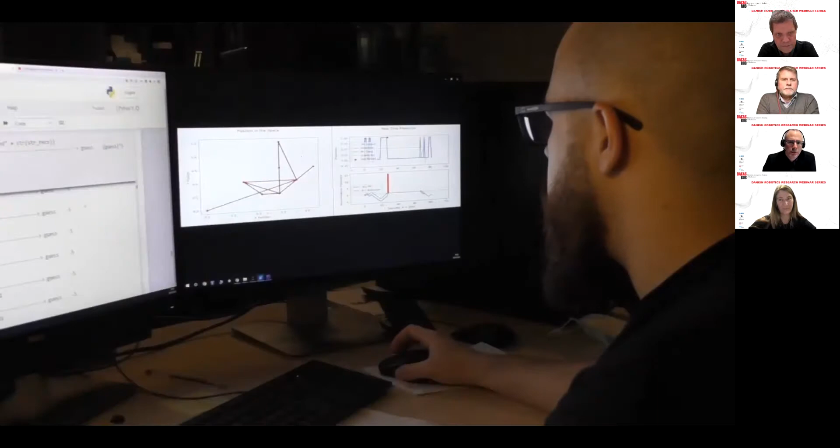To create this knowledge, we work on two angles: analyzing human group behavior and running experiments including guiding robots in lab and field situations. The data is then used to train a model for social navigation.

In our work on collaborative meat processing, we are investigating pre-movement prediction, making use of eye gaze tracking. By analyzing the dynamics of the operator's gaze behavior during a task, we are able to predict which object in the workspace the operator will be reaching for next.

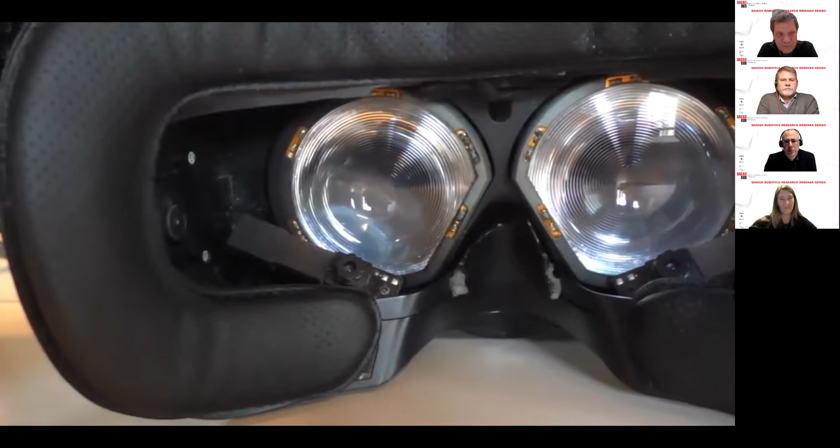Results of the first explorative studies are promising. Experiments were due to Corona run in VR, making use of a Pupil Labs eye tracker and HTC Vive. With 3 objects in the workspace, we were able to predict half a second before any action happened which object the user will work on next with 80% accuracy. Prediction rates at 1 second lie around 60%.

The current prediction is based purely on the eye gaze data without any consideration of the task context. So the next series of experiments thus aims at making this prediction more robust by integrating this contextual knowledge.

Affective states play a crucial role in stroke rehabilitation, but citizens are often missing the possibility to express their emotions due to motor or cognitive challenges. Thus, we engaged in a project with the Regional Neurocenter to develop a model for affect recognition.

In our model, we employed a linear combination of convolutional neural networks and long short-term memory networks. The CNNs extract facial features from the facial input data of citizens with traumatic brain injury, and the LSTM exploits the temporal relation on the basis of the extracted features.

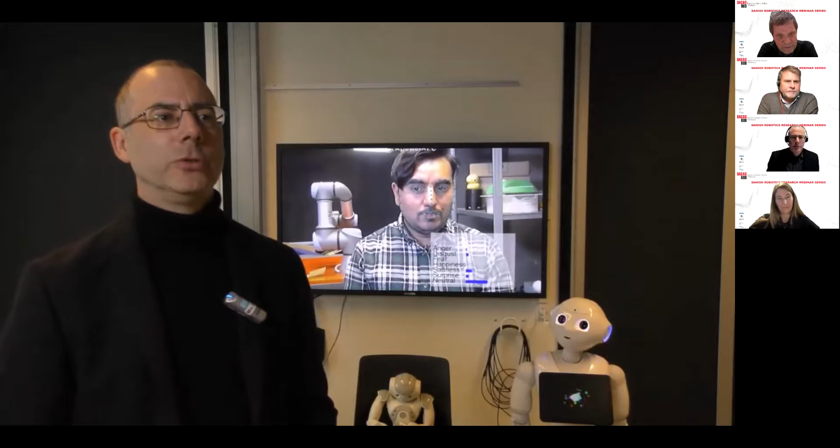The first field study at the Neurocenter, before the corona lockdown, showed that Pepper can be used as a motivational tool when supplied with the affect recognition system.

Institutional care has been described as a promising sector for the application of socially assistive robots, for example as companions for older people, reminding them about activities of daily living or taking their medicine. It has also been shown that development of these robots has been dominated by technical challenges and is often based on assumptions or stereotypes about the target group.

This impression was also confirmed by the institutional stakeholders we interacted with. As a consequence, we decided to take a strong user perspective into account and created an interdisciplinary team consisting of engineers, ethnographers, designers, care personnel, and of course the primary users.

We call this research strategy From Social Practice to Social Robots, with the main argument that we need to focus on the practices around the tasks we want to automate, to be able to integrate and not only disrupt the work and living routines in the institutional setting.

The different disciplines contribute to this research strategy by their own methods and research questions or their best practice guidelines. Our research process usually starts with an ethnographic study where all team members participate to study care practices in context.

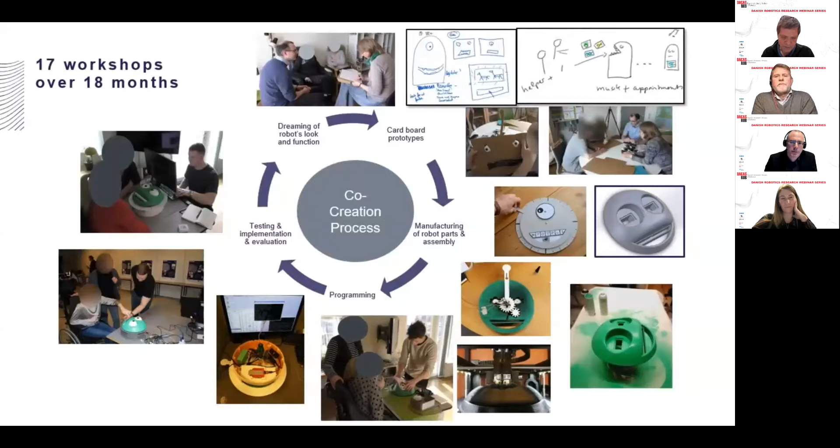Having decided on the general project idea, we start the co-creation process with the user, where in a series of workshops we develop design and functionality of the robot, starting with simple drawings, over cardboard models, to first working prototypes.

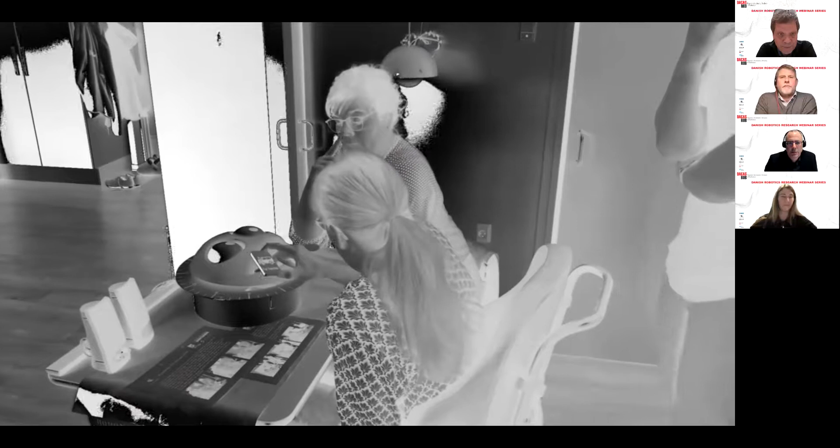When the whole team has converged on a viable solution, we start producing the robot at our own workshops, making use of current maker technologies like laser cutting and 3D printing. The finished product is then deployed and further tested in context, leading more often than not to further iterations.

Is this a scalable approach for robot development? Maybe not, but it allowed us to gain insights into the practices surrounding assistive robot technology in institutional care, especially regarding interactions with special needs users.

The three main results from this project are: a complex process model for reminding processes in institutional care that informs the further development of socially assistive robots; a new interaction model for institutional settings, moving from classical dialogical interaction to interaction with several users with different participation roles; and last but not least, a proof of concept for user-driven modular robot development.

Yes, thank you very much.